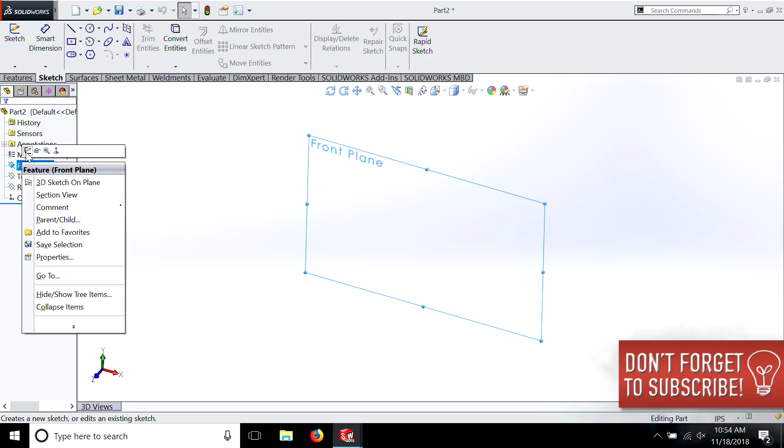Now that we have a blank page for our new part, we go front plane, then sketch. We now have our sketch open and ready to draw. I'm going to draw a box, and you can see we have different types of boxes. We can go corner rectangle if we want, picking the origin to lock, and it draws the box from the corner and locks it into that origin. But I prefer the center. Then we're going to go to smart dimensions.

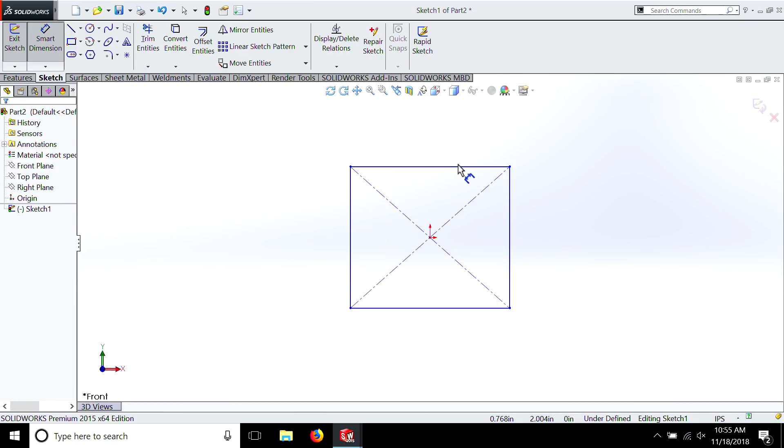2 inches on this one, 2 inches on this one. You know what, let's go 6 inches by 4 instead, I'm going to do something different. 6 inches by 4. Let's zoom out a little bit. So remember, this is just a 2D sketch, so there's no thickness to it.

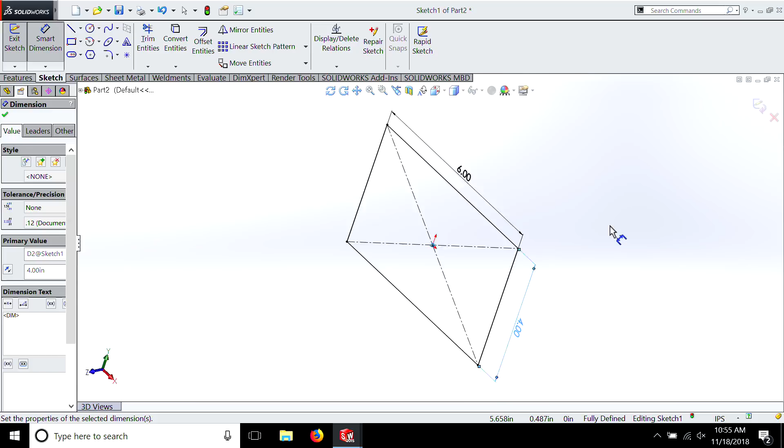So our next step, without closing the sketch, we go to Feature, and we go Extruded Boss Base. You only really have two choices the first time out. We're going to make it 0.5 inches thick, then hit the check mark or OK, and you can see we now have a flat plate.

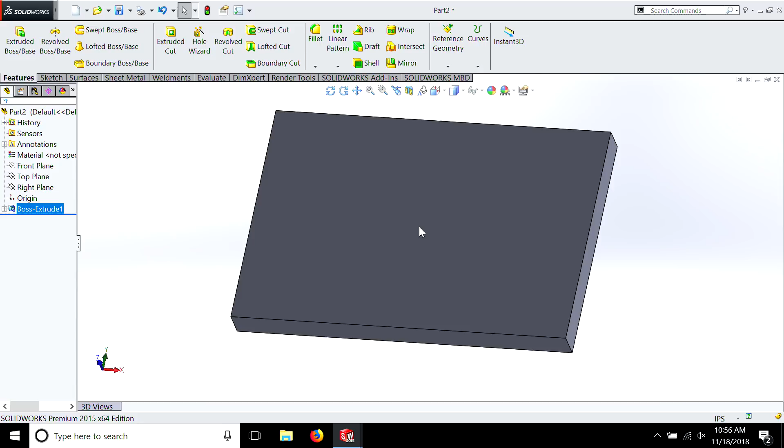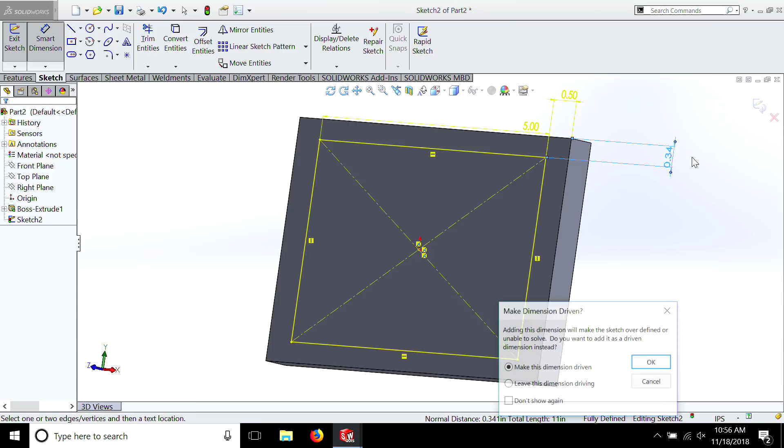So suppose we want to first make this plate hollow. We have a couple of options here. The easiest one is to select that face by right-clicking on it, hit Sketch, and go back to our center square. We can do this, and then dimension 1/2 inch on each side. Now you can see we have a square.

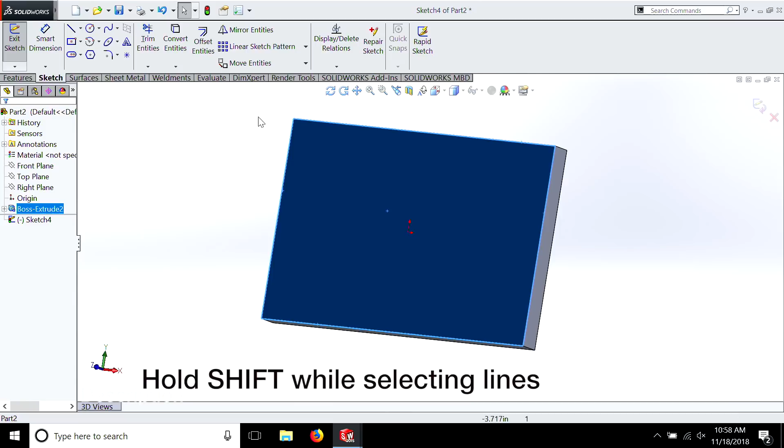There's also another way we can do this, so watch this. Let's back out of this. Let's select this plane, hit Sketch. We're going to select this line, also select this line, and this line. Then we're going to hit Offset Entities, and you can see it's now taking those lines and offsetting them by 1/2 inch. But it's on the outside, we want to reverse that, and that's a quick way you can do this.

Now you see that. So now we have that same box, but we can easily change this dimension to 0.375, and you see it changes all the sides. Let's put it back at 0.5.

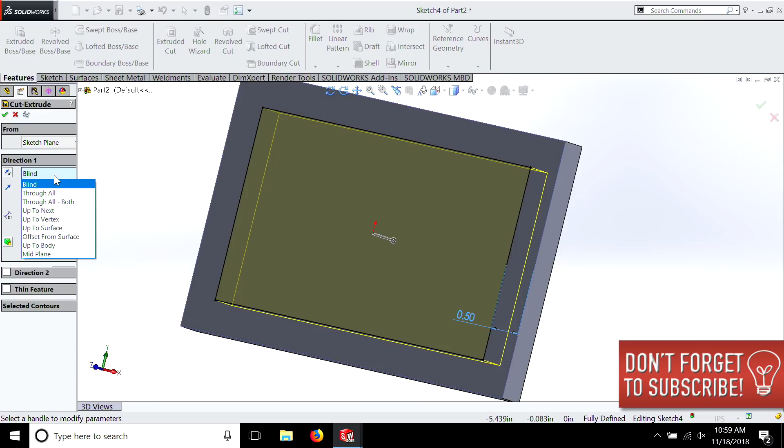Now what we're going to do is cut into this box. So we go Features, Extruded Cut. This is something I've been asked about: if you go blind, it's the dimension that you select. So obviously if we go 0.5, we'd still cut right through to the bottom, so we'll do 0.25 instead, and then we'll hit OK.

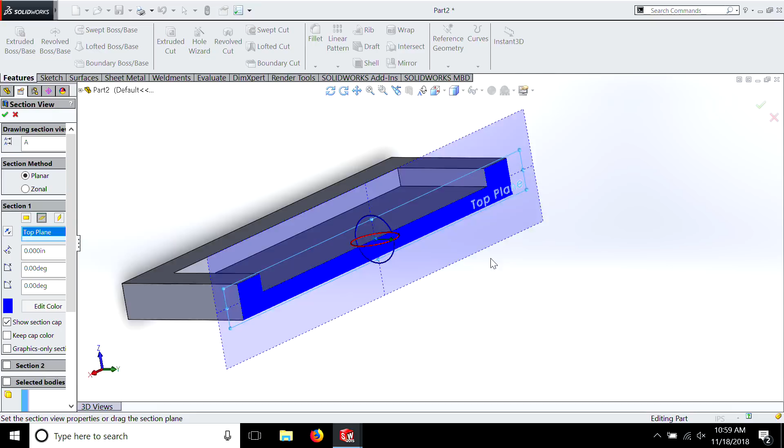And we can select this tool and change the plane. You see that? I've shown you this feature before, but it's a really handy tool to use so you can see it. If we select it again, it goes off. We can change which view we want, and then drag it through, as you see there. Once we hit OK, it stays that way while we're working, and then we just hit here and it goes away.

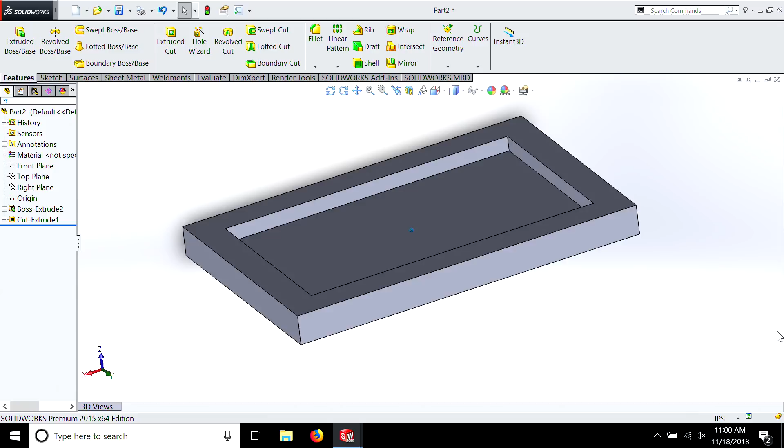But let's back out of this because I want to show you a different way of cutting. Suppose we want to cut through, but not all the way through. As I showed you, we can simply do Feature, Extruded Cut, 0.25 inches, and call it a day. But we may want to change this later, and tie it to another dimension.

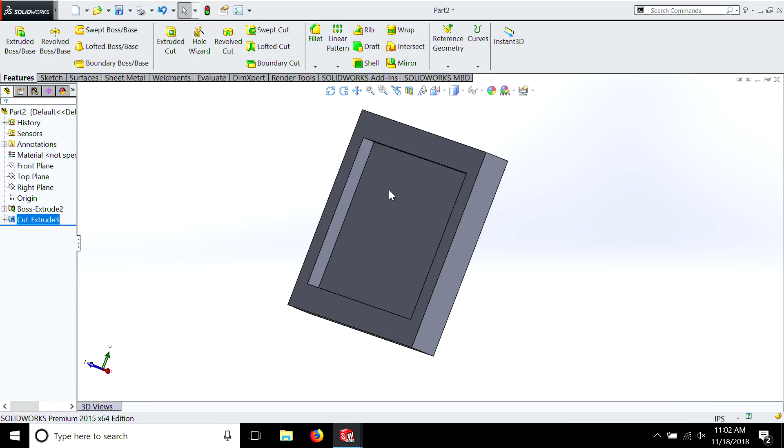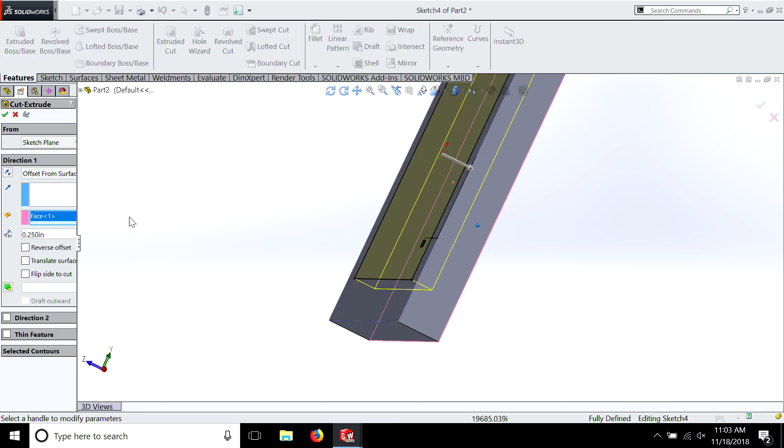So there's another way of doing this. We can go Features, Extruded Cut, and go from the sketch plane, but we're going to offset from surface instead. Now we're going to select the back surface, and just change that to 0.125. I think you can already see what's happening here.

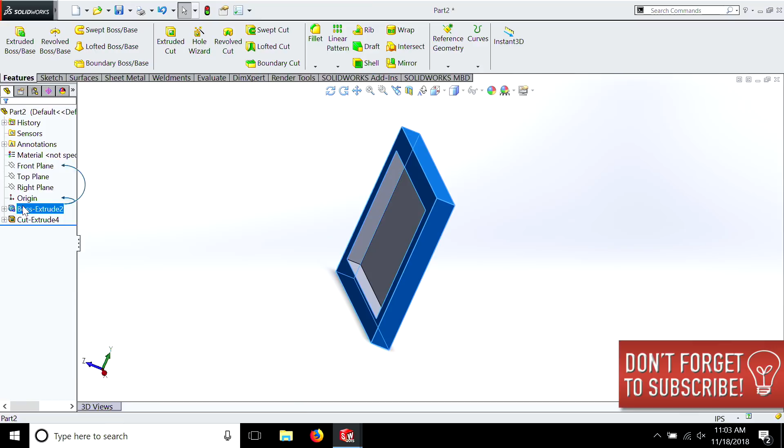You see that? If we hit OK, it did the same thing. But now watch what happens when I make this entire part thicker. Remember, we went up and made the boss here, so we right-click, Edit Feature. Now I want to make this an inch thick.

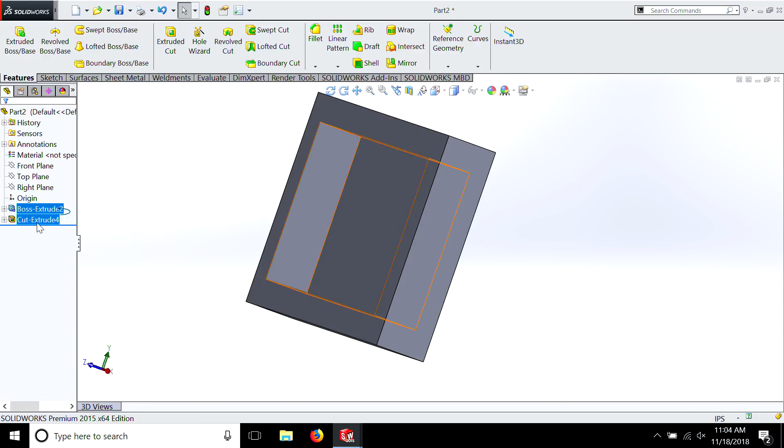But look what happens: the dimension for the cut still leaves that 1/8 inch back piece. Had we done it the normal way, just going down 3/8 of an inch, we'd have had to change that dimension too. But you can see it's now tied to that back plate. In the case of this design, it might have been a critical dimension, so this is a good way to go. That concludes the end of the 5-minute portion of this video.

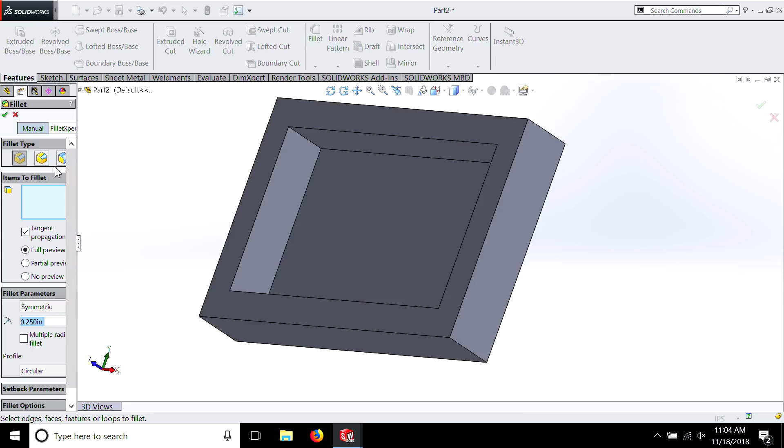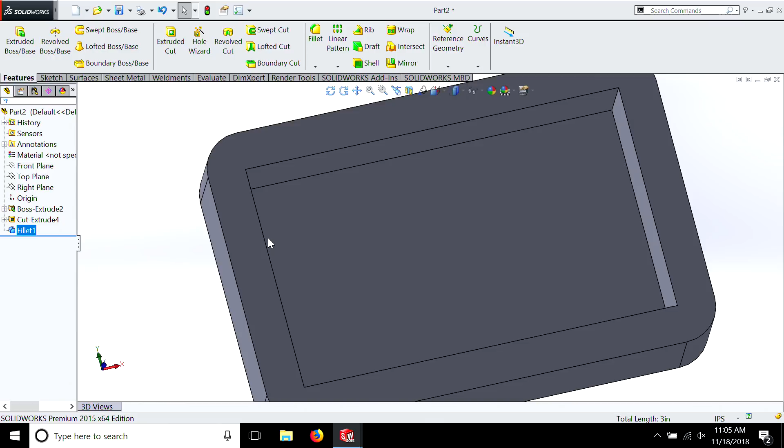So let's add a few more things to this. We can go to Features again and look for fillets. Let's say we want 1/4 inch fillets, 0.25, and select the edges: 0.25, 0.25, 0.25. Actually, I'm going to make them a little thicker, 0.5, because this took me a long time to learn—since our wall thickness is actually 1/4 inch, this is going to be the correct inside fillet, because this is the center of that 1/2 inch fillet.

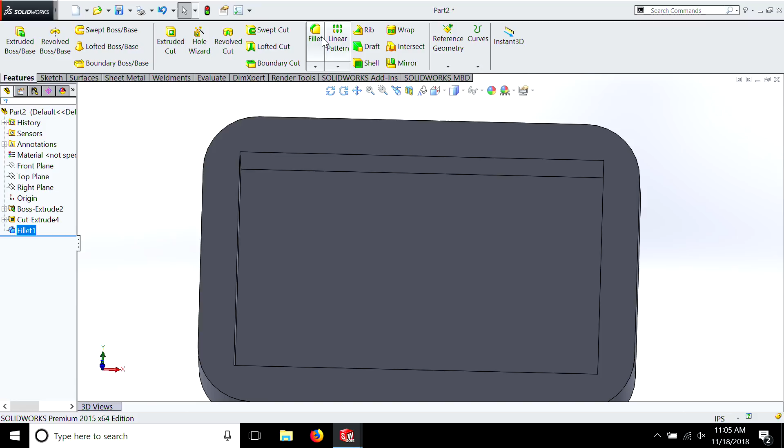So we may want to go even further, let's say 0.75, which is a pretty big fillet, but watch. Then on the inside we do another fillet, 0.25. So we're going to go here, and here, here, here, and here. We hit OK.

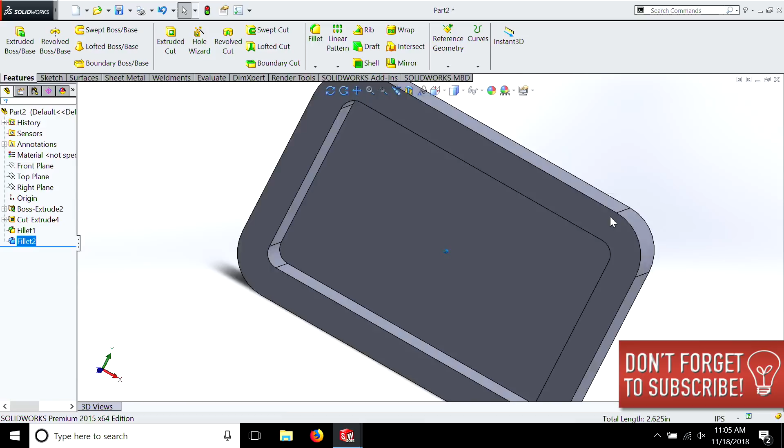Now when you look at this, you can see the thickness maintains the same width all the way around the part. So remember, when doing outside fillets, compensate for the thickness of the wall and it'll look a lot nicer. This part is kind of round, but we're not really designing anything in particular—we're just doing some features to learn how to do things. So let's get back to this.

Now suppose we wanted to put some threaded holes in this design. Once we open this sketch, we're going to need some lines to tell us where our threaded holes are going to go. We can draw what are called center lines. Center lines are basically dotted lines that don't have anything to do with your sketch other than for reference. So let's see what that looks like.

We're going to go to our line tool up here and select the second one, which is center line. Actually, let's do it a little different since that was in one direction—let's go with midpoint line. Watch this: we're going to come here, hit escape to get out of that, come here, and draw another one.

Now the problem—you can see they're automatically perpendicular—is that these lines are actually drawing lines used in sketching. So we need to select this box for construction, which we do by clicking on a line; the properties come up for construction. Now you can see they're dotted, meaning it won't care about those lines when it comes to cutting, extruding, and doing all the other stuff. So that's what we use our center lines for—just for dimensions and references.

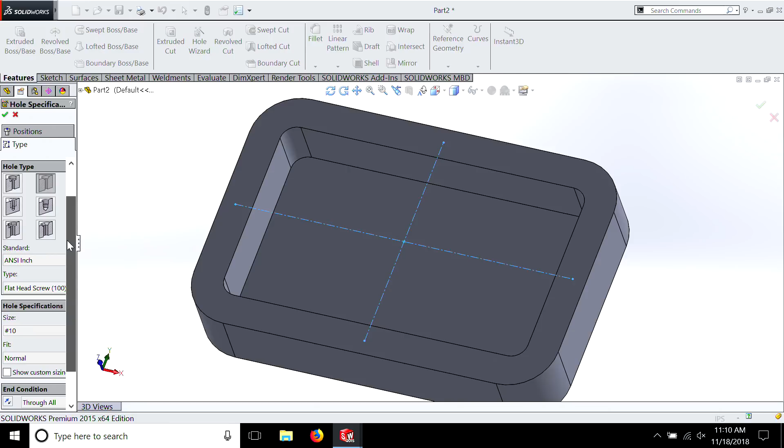So now that we have our reference lines, we're going to exit the sketch, then go to Features and look for Hole Wizard. The Hole Wizard gives us all kinds of selections. Remember, I said I want to do threaded holes, so we're going to look for threaded holes, which are right here—a tapped hole. I'm going to use a number 8, so we'll move it up.

And then we can go through all, which obviously means that we're going to go through with the tapped hole. But let's not do that. We know the part's now 1 inch thick, so let's go 3/4. So we're going to go blind. We're going to go 0.75. Now this is how far the threaded hole goes down. I'm going to change this to 0.5 because that's pretty easy to get. You still have a 1/4 inch difference between the 0.75 and the 1/2 inch hole.

So we're going to do thread call out. We're just going to leave it like that. Near side countersink should be okay. So the near side countersink is just a deburring around the edge of the drilled hole so that it's easy to start the tap and also the screw once it's completed. So let's watch what happens.

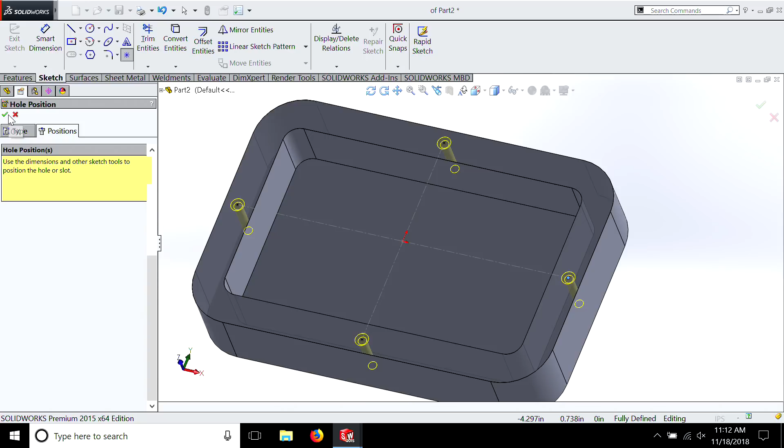So we have our 4 reference points that we used here. We can now call out these. We go to positions, we select this surface, and look what happens. We're going to put this pencil right on that dot. And there we go. And we hit OK. Now you see our threaded holes. Now on purpose I did this. I never dimensioned these lines because I want to show you.

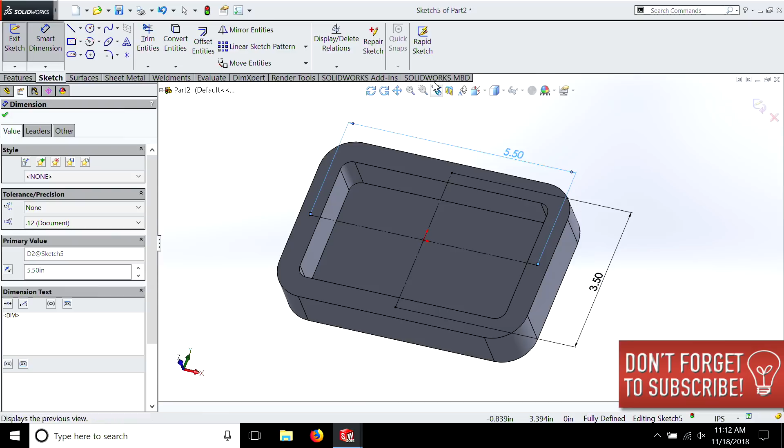You just go back, hit Edit Sketch, Smart Dimension, and we're just going to edit these lines so that they're in the center. 3.5, and this one's obviously going to be 5.5. And you can see now they're black because if you remember before, watch. If I just, now they're blue, which means that we can drag here. If I grab that line, see, it's not dimensioned properly. So go back to Smart Dimension, 5.5, there you go, Exit Sketch.

So these are the exact dimensions needed for a number 8-32 threaded hole. So you don't have to worry about it beyond this. When it goes to making this part, the machinist will see it and know exactly what to do. So you don't even have to worry about it from here. It's called out, it's good to go.

Now there are ways to show the thread, but anymore, as parts get more and more complicated, I don't recommend doing it. You're better off getting used to the fact that you don't actually see the threads because it's easier on the processor for the graphics. So don't worry about it, especially when you're doing complicated parts like my dive light over there. You really don't want to start showing all the threaded holes. It also depends on the processing power of your computer. So let's get back to this.

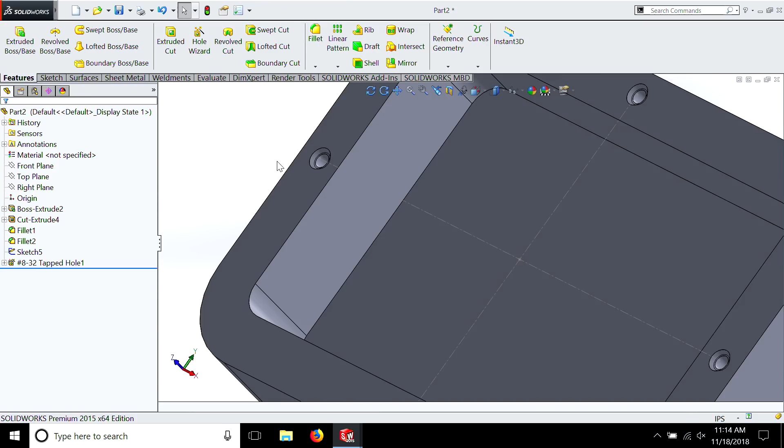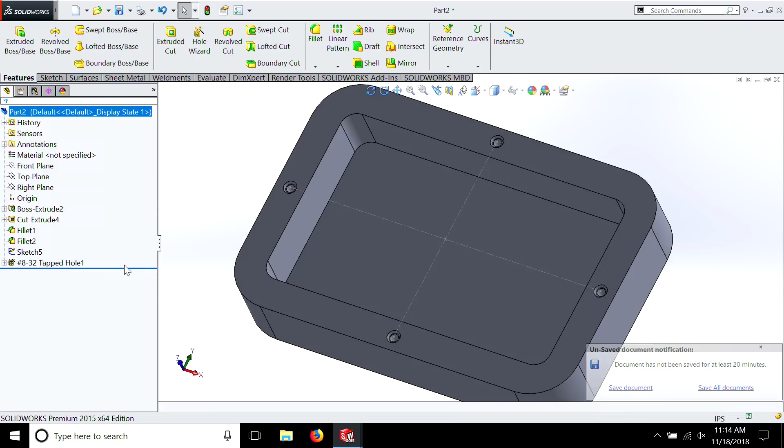So another way we can do this, and here's another feature I haven't shown you. Watch this. See this line here? We can move this line up, and now those holes disappear. If we want them back, we just drag the line back. Now keep in mind that this is done in order, so anything at the end obviously is going to have to disappear with it. So if you want individual things to go away, watch how we do that. You can go up to the tap hole, right-click on it, and then you look for the one that says suppress and make it disappear. If you want that sketch to disappear, you can do that individually also.

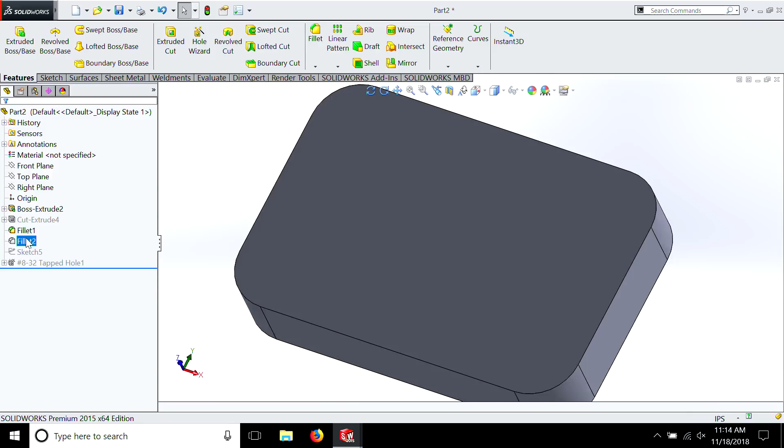You can do the same for the fillets. Let's do the inside fillets. We'll suppress them, and you see now they disappear, but they're still there. We can also leave other things in between, so suppress, and you notice the fillets are still on the outside and also the box, but let's put it back. And there we are. So we're going to move our line up, and I'm going to show you another way to do some tapped holes.

So let's go back to this surface, select Sketch. We're going to draw our centerline box. We're going to go into the center. It's now locked on the center. We're going to avoid that edge, and then we're going to hit for construction. Don't forget to do that. And then we're going to go Smart Dimensions. And we know this is a 1/2 inch.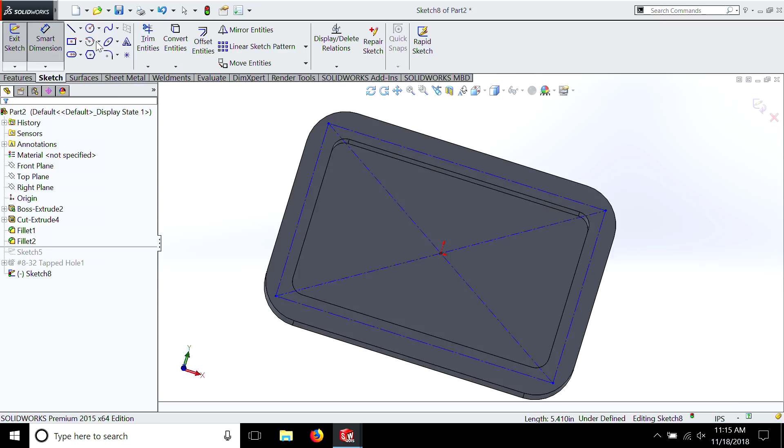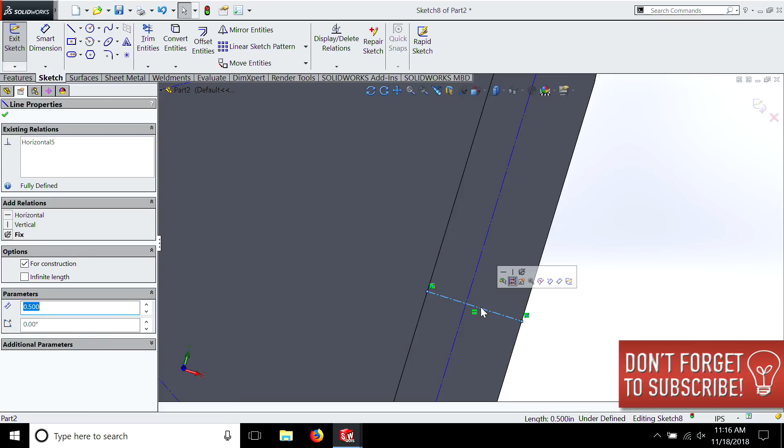Let me show you a little trick. Just if you want to lock it so you don't do dimensions. You go here and here, hit escape to release the line. You can also hold the mouse down and do it, I don't get used to it. I tend to forget. I'm just used to doing it this way. So watch this. Did you see that light up a second ago? We had a center line. Well, there's also a center line here.

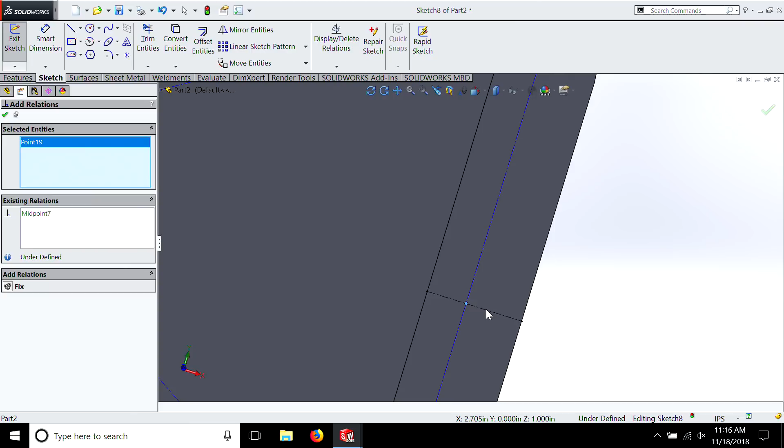If we add a little dot, for some reason you can't really do this any other way, you add a little dot to there. Now we go to Add Relations. So watch this, Add Relations. And we're going to hit that dot that is locked onto that line. And we're going to hit there. So we have the dot and this line, and we're going to select midpoint. Now look at that. Now we're always locked in there on the midpoint, and we can do the same thing over here. Hopefully I'll get it right. So we go midpoint. That little dot is on that midpoint, and then we're going to hit OK.

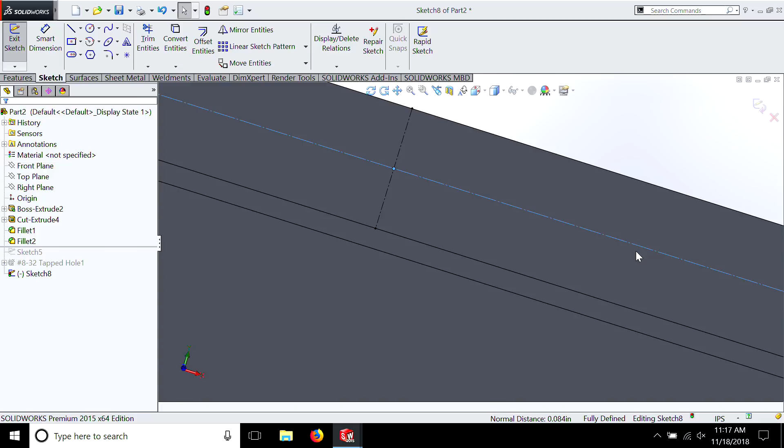Now, this is something to keep in mind with any program you're using, whether it's Solidworks, Fusion 360, any parametric program like this. You want to avoid as many dimensions as you can and use those relations. By doing this, if you make a mistake, it's easy to change it because then you only have one dimension to change and everything else will change with it.

If you dimension every little thing without doing it this way, what's going to happen is you're going to have to go back and manually change every single dimension. And you want to avoid doing that because believe me, while you're designing things, you're going to have to make changes. So let's take a look again.

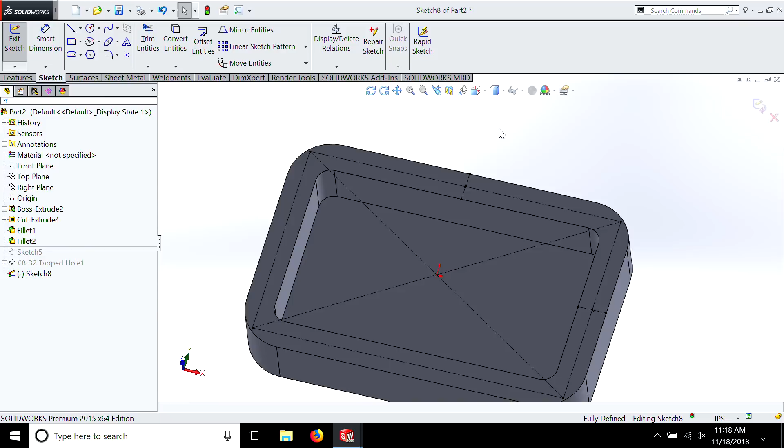So now we have this line that goes nicely around the entire box. There's a couple of things we can do here. So one thing is we can now start calling out more dots. So we could put a dot here, put a dot here. Now remember, we just said go add relation. I'm going to at that point select it. I'm going to select this point and I'm going to select this line and I'm going to go symmetric.

Now keep this in mind, symmetry always occurs around a line or an edge. So you have to make sure you select a line in the center and then your points on each side. And they pretty much have to be the same thing on both sides. And obviously symmetry means that it's always going to follow that center. So watch, smart dimensions. We're going to go here to here. We can do 3 inches. And you see there it's nice and centered.

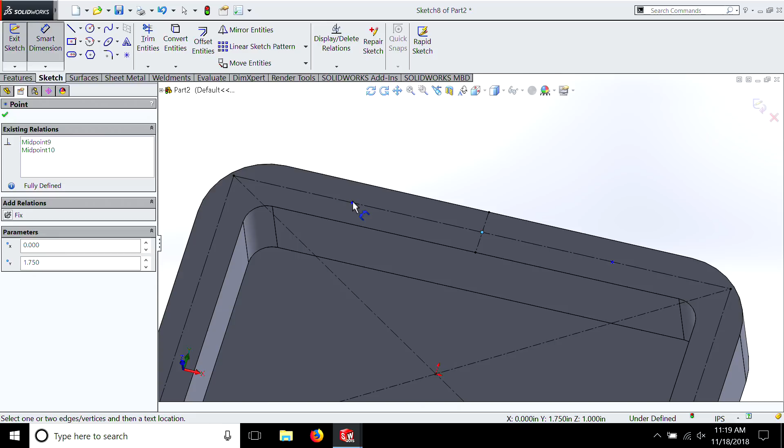Or watch this. We could have also done smart dimensions there to that line, 1.5. And let's just take a look. Yeah, that's pretty good. That's not bad at all, right? But notice this one is automatically locked to this dimension. If I make it 1, the other one's going to move. If I make it 2, it's going to move as well. So now we have 2 there, and we have 1 on this side.

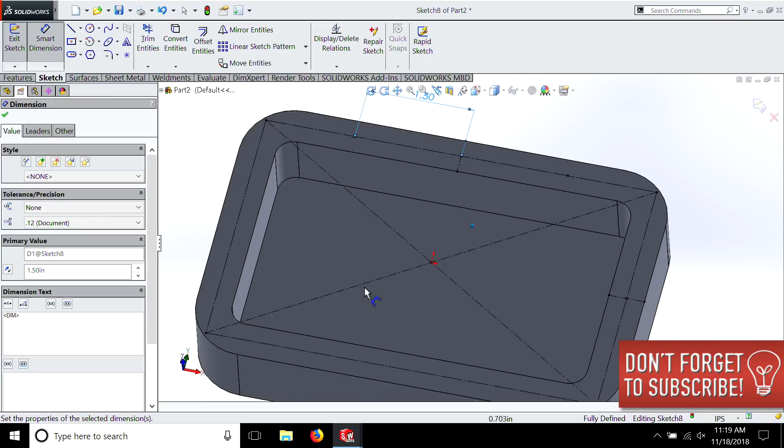We can go over to the other side and add another one, but I'm going to show you another little trick. I don't particularly like doing this, but it does work. We could take a center line, we can put it here, we can go mirror entities, we can select this dot, we can mirror about that line, and it should throw a dot on the other side. We can do the same for the top. So go center line, go here, we can select mirror entities, 1, 2, 3, mirror about that line, and hit OK. And there you go.

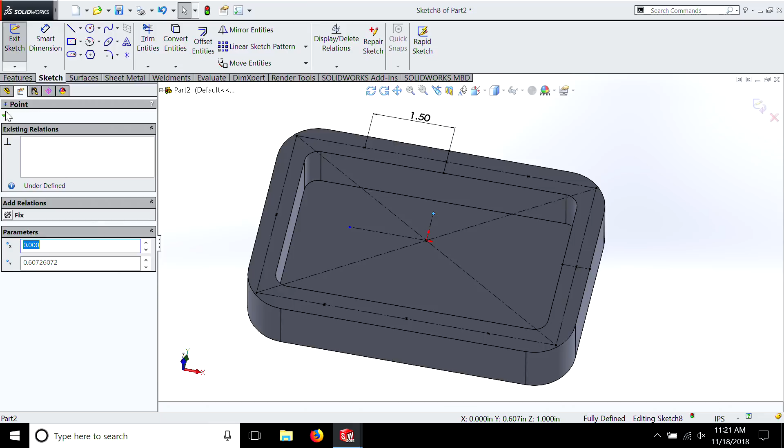Now remember we talked about dimensioning. Because this one line is a reference line, the one here, you don't have to dimension it. It's just floating in space and it's not used in any kind of actual building of the part. It's just so we know where everything else is mirrored in this case. Okay, so we select OK. We're going to exit the sketch.

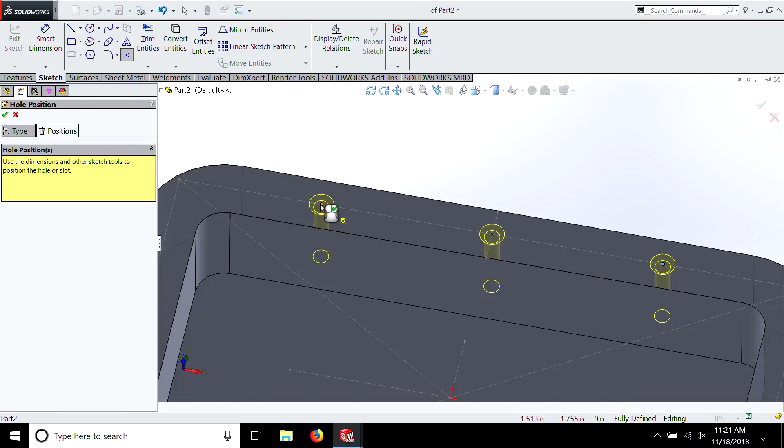We're going to go back up to our feature, select Hole Wizard. We already had those other ones, but we erased them. So now we go position. We're going to say we're going to do it on this surface. It gives us 1 here, here, here, and here. And I'm not going to do these, and I'll show you why.

So we could have gone around the whole thing, but I'm trying to teach you guys a lot of neat tricks in this episode. Because if you watch the first 10, you should have an idea of what I'm doing by now. So I'm just showing you how to improve the way you design. So watch this.

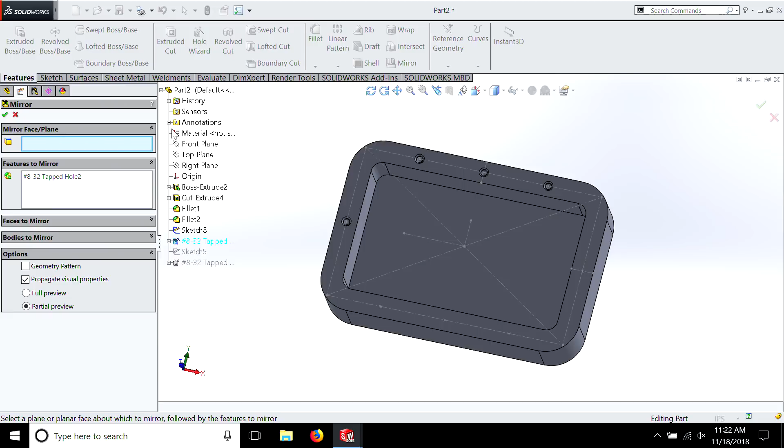Just like we are able to mirror a sketch, we can also mirror features. So we go mirror, and now we're in features, not sketch. This is a different mirror. And we're going to mirror about a face or a plane, a 3D dimension, not that line. And we are going to select our top plane. And look what happens. It's selecting these three and automatically going over here. We then hit OK, and there you go.

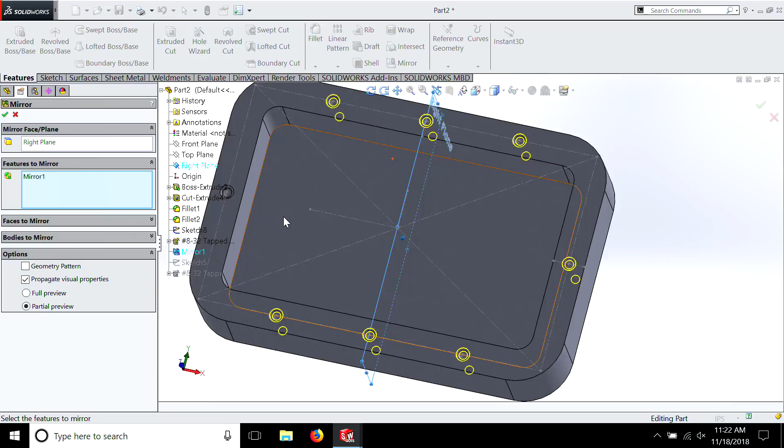But we still have to do this one, so we hit mirror again. Now we're going to do this other plane. You see this, right? So it's this screw.

Think of it sort of like a ping pong table or a tennis court. This screw is going to be over this fence on the exact other side. And then there you go, hit OK, and look at that. So now we have threaded holes.

I'm going to get into this in future episodes, but there's one thing to know about the way I'm teaching you this. All these parts that I'm drawing are CNC machinable. This part is not just 3D printable. Because the fillets are here, we are able to machine this. So let's look at that closer. How would I machine this box?

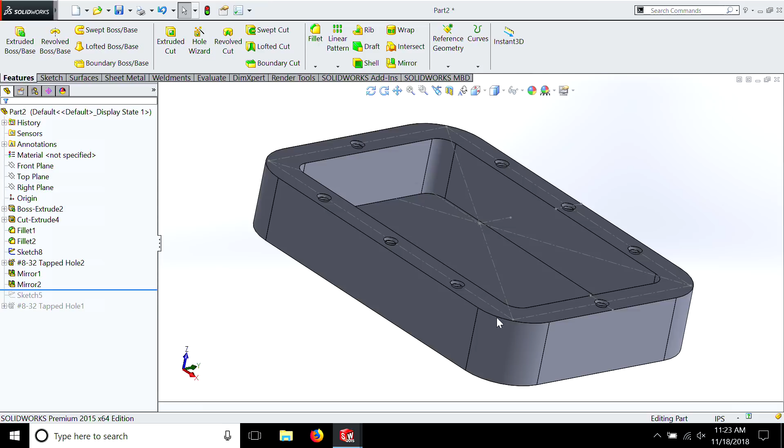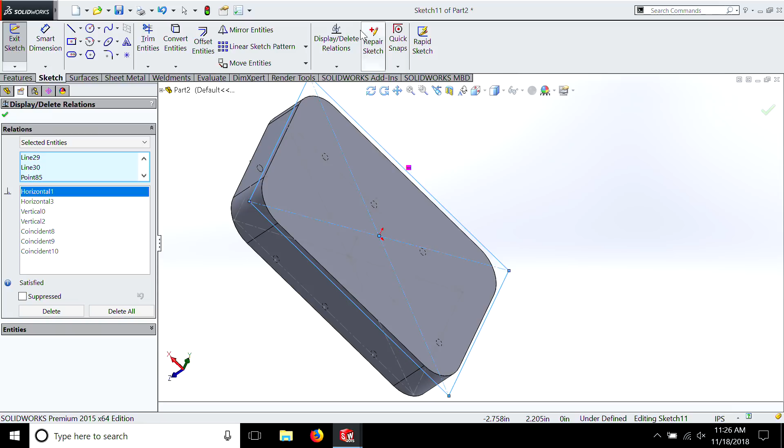Well, I would take a solid chunk of aluminum. I would have to mount it on the bottom somehow. If there's no holes or anything, what they would do is they would simply take, and I'm just drawing this so you understand what I'm doing. We draw a box. We go to display relations, add display, oh, shoot. We go to add relation.

We want that line and that line to be collinear. This line and this line to be collinear. There we have it. Now we're going to exit, and there you go. And this is really how they would make it in a CNC machine. And look, we have all these lines bothering us, so let's go up, find that sketch, and we can just go hide.

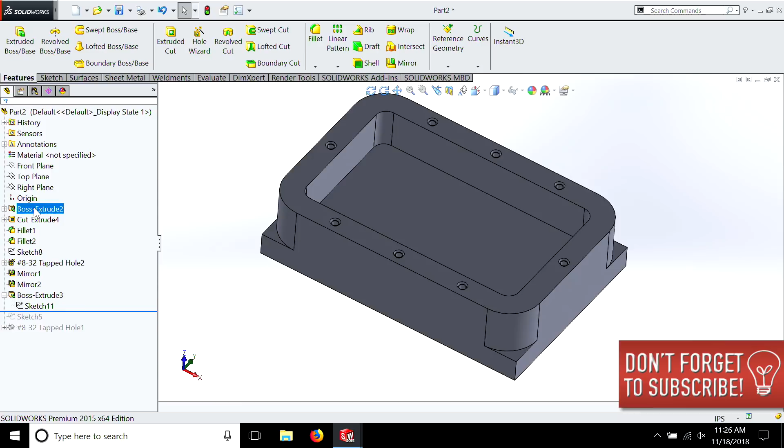You don't want to suppress that because it's used as a reference, so make sure you hide it so you can't see it, but it's not suppressed because the sketch is being used in the entire model. So keep that in mind. Suppress is different than hide. So this is what they would actually build to machine it. They would hold it in the vise. They would cut all this stuff, drill your holes, tap them, do this inside fillet, and yes, this is machinable.

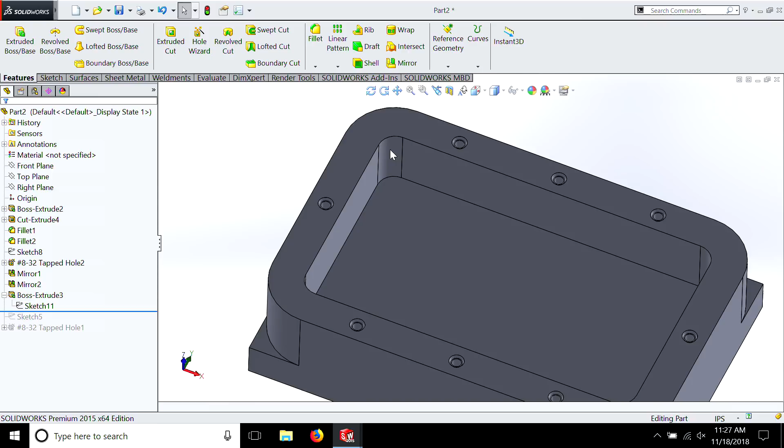Let me show you something that is not machinable. If we just suppress these fillets, we can no longer machine this part. Do you know why? Well, think about it. A cutting tool is circular, and you need a certain amount of thickness to that tool, which means you need a radius. So in order to cut inside cuts like that, the part is always going to have a curve in it. So keep that in mind.

So you can't do this simply. We just took a very simple part to make and made it really expensive. And remember, we don't want to do that. It's about making the simplest parts possible for our inventions. Put that fillet back in. Unsuppress, there you go. And remember, this is a nice 1/4 inch radius, which means we can use a 1/2 inch cutting tool, which is really good because they're fast, they're cheap, we won't have any problems, especially if we're cutting this out of aluminum.

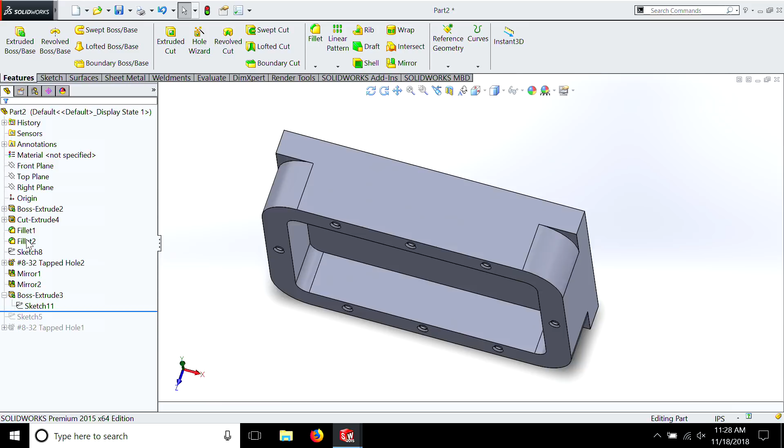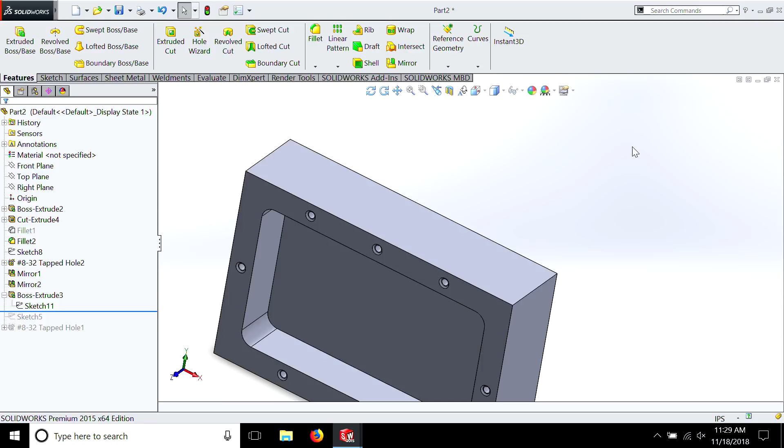So let's get back to this part. We've cut it, we have nice CNC machinable edges, the outside isn't a problem. Oh, and watch this. I forgot to tell you, unlike the inside feature, the outside is machinable as a square because the cutting tool can go outside and then go down the other edge and come back around and cut that without problem because there's no inside radiuses. Inside radiuses are the only thing that's a problem with CNC. So let's put that back as well.

All right, so we've machined this part. They're going to turn it over. And then they're literally just going to come and shave this off with an end mill or a fly cutter. They'll flip it over by hand, stick it in the vise, close the vise up, and shave it off. No big deal. So let's get rid of that.

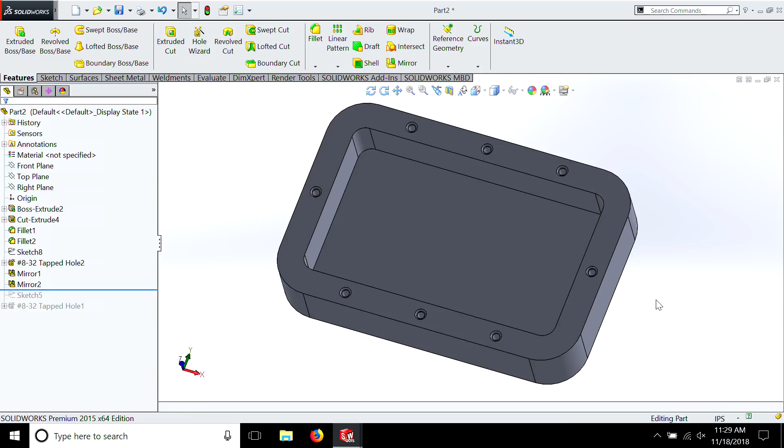Now there are other things that we could do to improve the design of this part, but for this video, I wanted you guys to get an idea of how you can get started making some of these first parts. They're not complicated. Now I use Solidworks, but you can use Fusion 360. They're both really good at designing these types of parts. But keep in mind, you need to be thinking about the manufacturing process as you're doing the design.

And it's very similar to what I showed you here, where you have to worry about cutting tools or the manufacturing processes involved. Now this was a very simple and quick part that we were able to design, and I'm going to save it because we're going to go on and do some other things in the next episode.